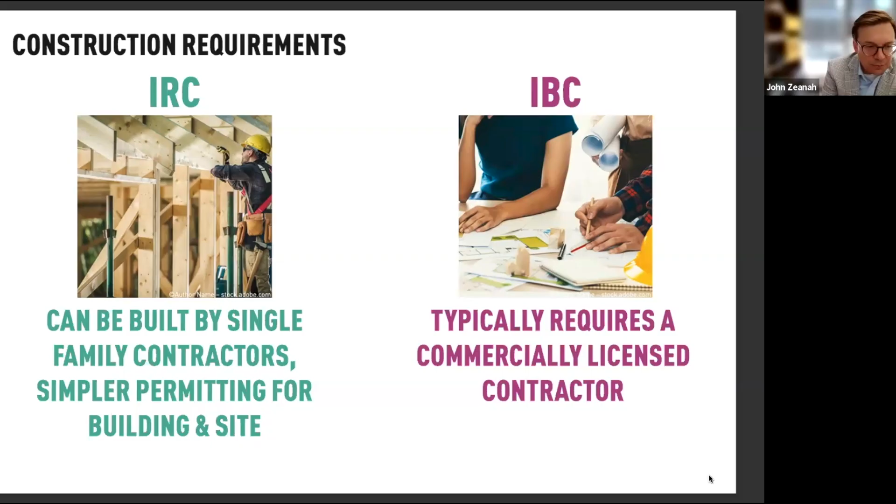The residential code includes a lot of prescriptive structural tables. In other words, a lot of the engineering for residential code projects has been done for the code, and so the builder simply just has to follow a lot of prescriptive standards that are in the code. Builder prepared plans are often sufficient - there's not a detailed plan set that includes things like mechanical, electrical, plumbing, the types of things required in the building code. So designs that go through the building code typically require a professional stamp from an architect or an engineer, not just for mechanical, electrical, plumbing, but for structural and for things like sprinkler engineering.

In most jurisdictions, residential permitting is much simpler, but commercial permitting is much more difficult. A lot of communities have different pathways for getting through the building code review process for a residential permit versus a commercial permit. The IBC covers everything from the small multifamily - 3-unit, 4-unit, 6-unit, et cetera - all the way up to industrial warehouses, airports, sports facilities. So it's natural that there's going to be a higher level of scrutiny for larger commercial projects. The issue is our smaller multifamily projects are getting lumped in with those.

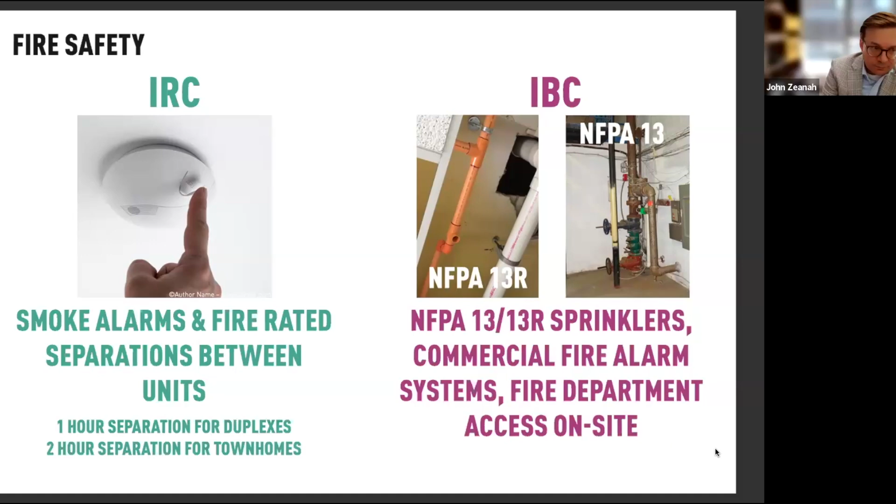There is also the NFPA 13D system. As I mentioned, 48 out of the 50 states in the U.S. do exempt buildings in the residential code from sprinkler standards. The NFPA 13D standard is designed for buildings in the residential code, so we don't see it as often, but it is a lower cost standard than the NFPA 13R, and is a standard that some states and cities are experimenting with using on structures that have more than two units, particularly for small multifamily.

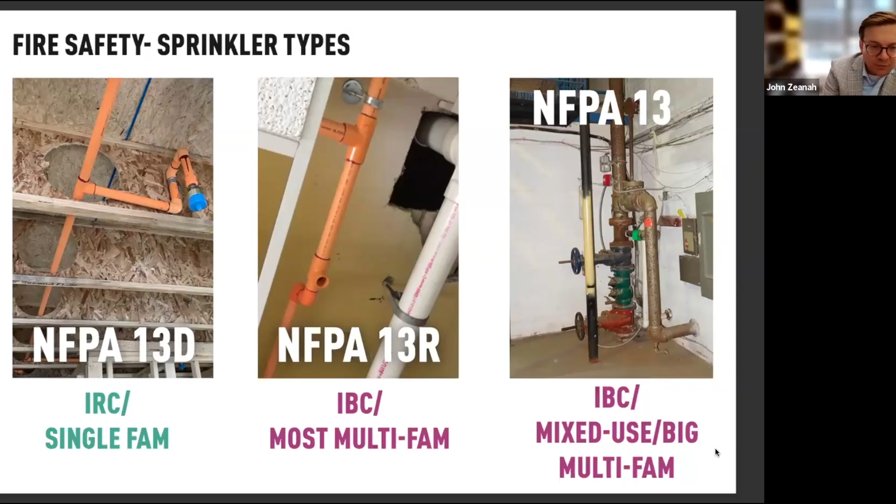There are other local code hurdles as well. As I mentioned, that gap between 2 units and 3 units that's in the building code often gets transferred over to other code requirements in local jurisdictions, just to create a dividing line between residential and multifamily, residential and commercial, residential and non-residential, however it might be divided in your jurisdiction - everything from trash requirements, tax requirements, parking requirements. There's a lot of differences that get placed in that gap between 2 units and 3 units.

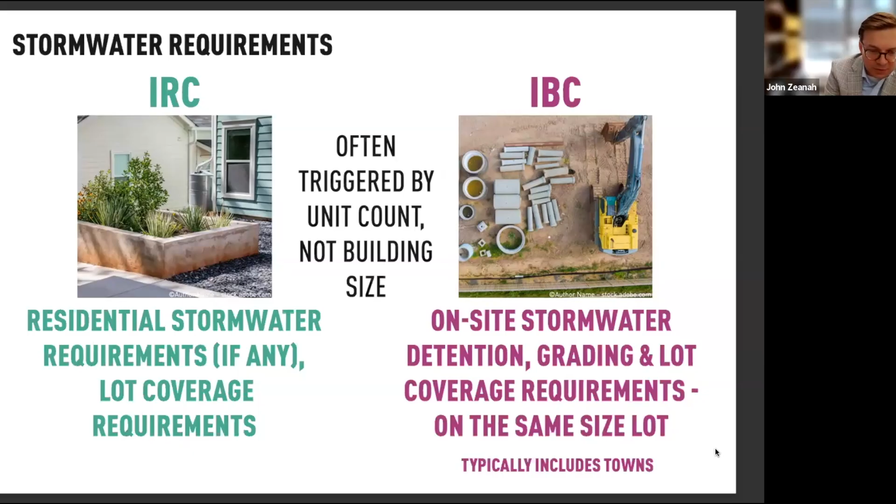Some common requirements are in stormwater, which are often triggered by unit count, not necessarily building size. But the issue with stormwater is really about the area of impervious surface, which doesn't have much bearing on unit counts as much as building footprint. So a single family house with the same building footprint as a quadplex may have much lower requirements in terms of meeting stormwater compliance in one jurisdiction or another.

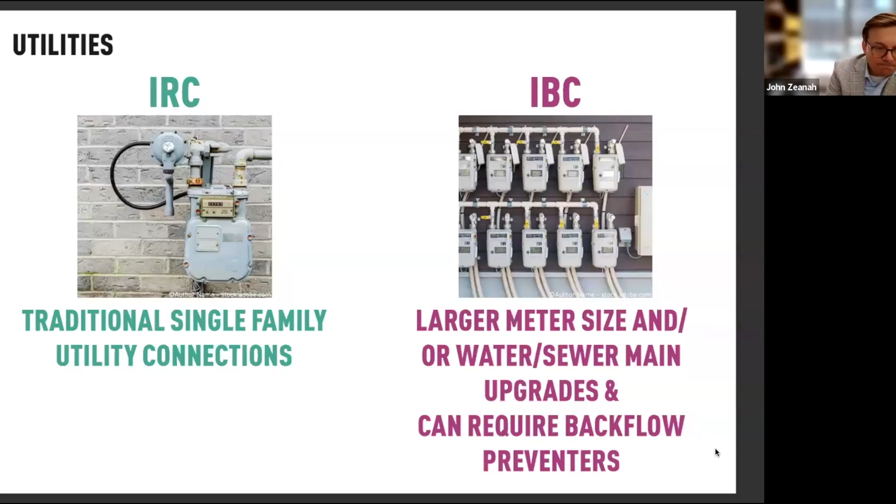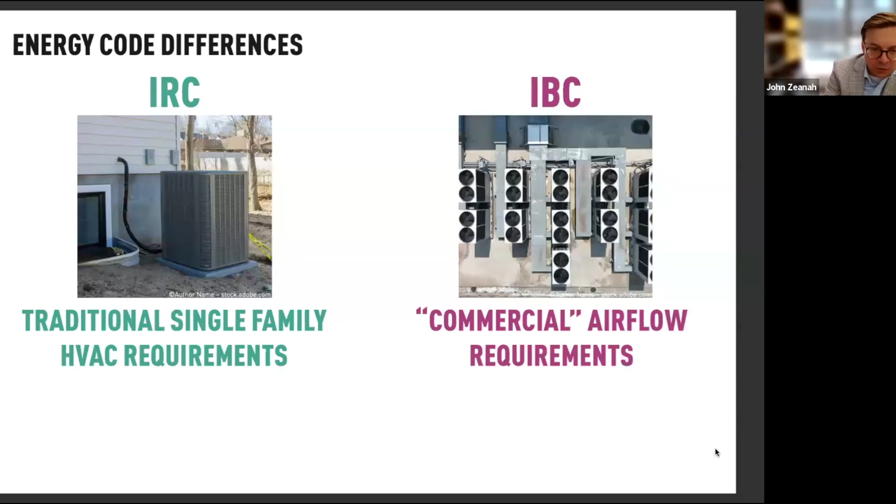Energy code differences are found between the residential code and the building code. Certainly energy code requirements help ensure that as new buildings come online, they're more sustainable and more resilient. But again, they're written with a divide between 2 units and 3 units, so the higher requirements typically attach to small multifamily once you get to 3 units.

Accessibility requirements attach once you get to 4 units.

Elevator requirements typically attach once you go beyond 3 stories.

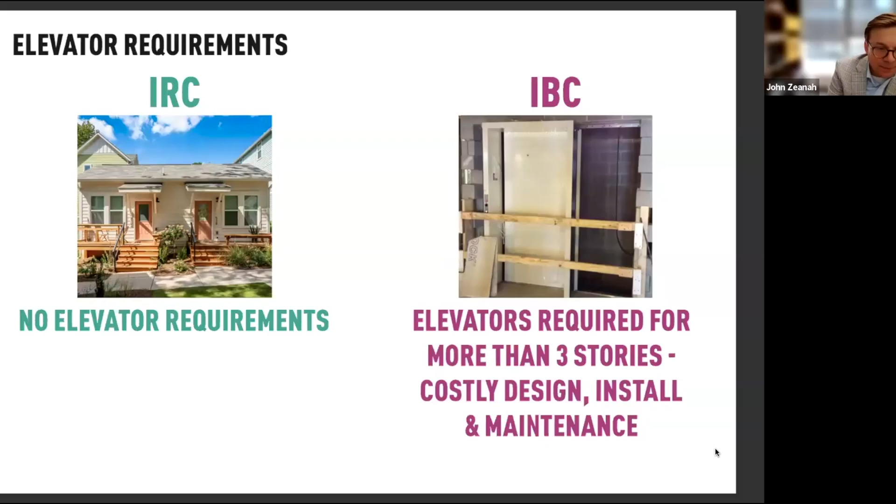Stair requirements also get added on once you get beyond 3 stories.

And then, of course, if you're trying to do renovation of existing buildings—maybe your town has a lot of older single-family buildings that are sized in such a way that they could be converted into a quadplex, for example—those codes, that change of occupancy, triggers a lot of these additional requirements. So if your community is looking at changing building codes, don't forget about existing buildings and what needs to be adjusted to make sure conversions are treated the same as new construction in your community.

Last couple of things: mixed use is another example of code burden to think about. For a lot of communities that want to see small mixed use, the ideal is to have ground floor commercial with residential above. But a lot of times those projects get kicked up into a much more stringent level of requirements. On the earlier slide, when I showed the difference between the 13R and the 13 sprinkler system, you could visually see the physical differences between those two systems and what all is required. A lot of vertical mixed use is going to kick into those commercial sprinklers, even if the ground floor commercial is not something that would require, say, a vent hood or have combustible materials, that sort of thing.

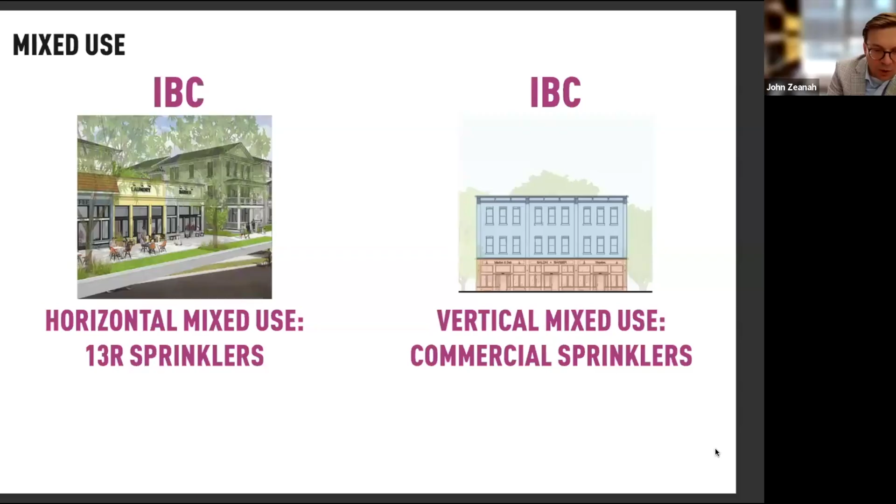The bottom line here is that through so many of these regulations, what we're doing is streamlining multifamily permitting and construction while extracting the most concessions out of our commercial development. What it often does in many jurisdictions is this: communities try to make middle scale housing legal by changing zoning, but then there are all these other regulations where we're extracting maximum concessions from IBC development that make missing middle infeasible to build. So really, the main point of the report that was written is that for communities wanting to see more middle scale housing built, you've got to go beyond zoning. Zoning is certainly a critical first step, but there are so many other steps that communities need to look at in their regulatory environment.

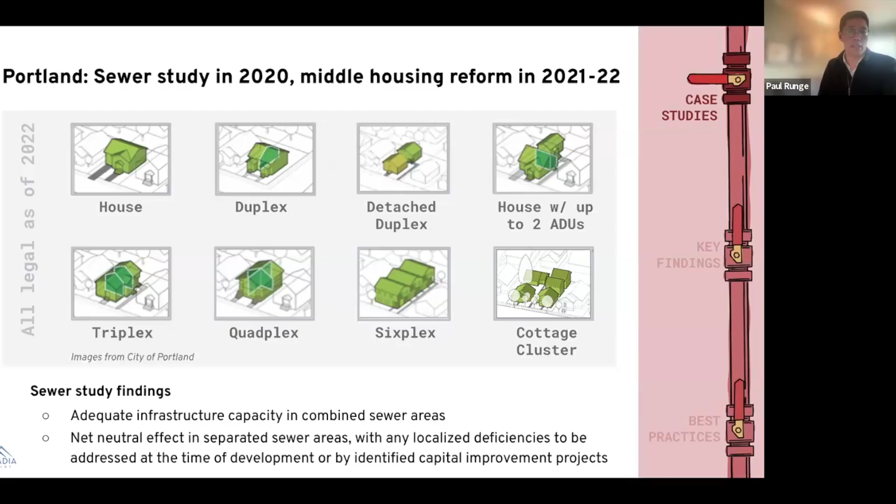The issues were also alleviated by requiring developers to extend or upsize infrastructure if they wanted to develop parcels considered inadequately served. So Portland's study ultimately concluded that middle housing would have a net neutral effect on the separated sewer system because of all of those interventions. The study gave middle housing the green light to move forward. So as a high level takeaway, the city started from a place of 'yes, this can work,' then sought reassurance in detail through a study, and then put in place policy solutions to ensure that the change went smoothly.

Since middle housing was re-legalized, Portland has permitted over 1,400 new infill and middle housing units, including infill middle housing and accessory dwelling units. And as expected by the study, the city has not experienced any localized overflows and backups.

So, a success. Developers do have to manage stormwater on site as much as feasible. They have to upgrade deficient infrastructure that may be around or serving the site. But what that generally means is that developers seek sites that can percolate stormwater and that are in areas well served by infrastructure. In other words, developers try to avoid costly problem areas.

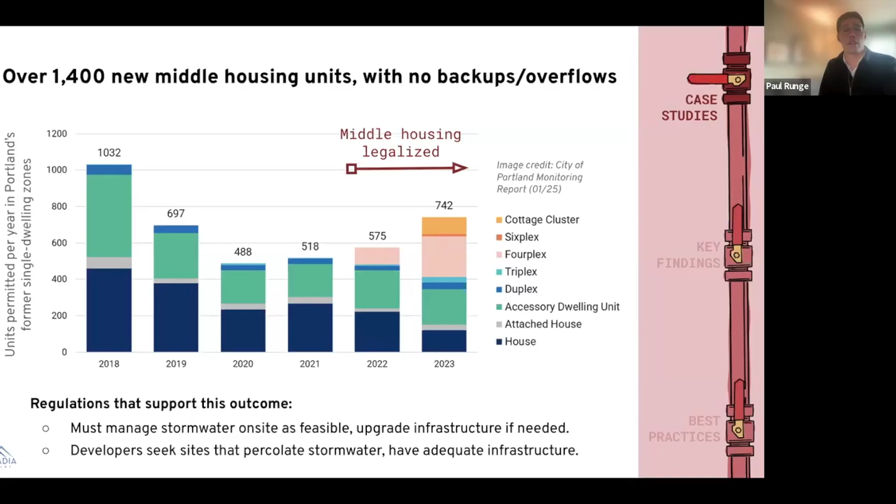The city is now considering allowing mid-rise apartments in a large part of Portland's inner east side, following a similar path as they did for middle housing, starting with a study. The city's Bureau of Planning and Sustainability has completed a study of infrastructure capacity in 2025, and the City Council's Land Use Committee recently unanimously approved a resolution to consider zoning changes by mid-2027.

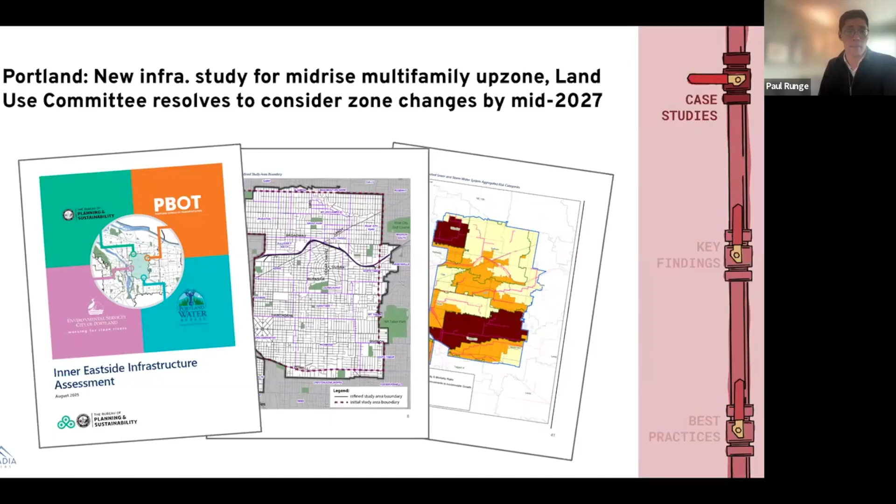So we think this is an illustrative case of how all this can work, and of our broader point that cities don't need to blindly block middle housing over sewer concerns. You just need a game plan. Existing infrastructure can often handle the job and gives you a place to start. We encourage folks to start from a default position of, yes, this can work. Let's figure out exactly how.

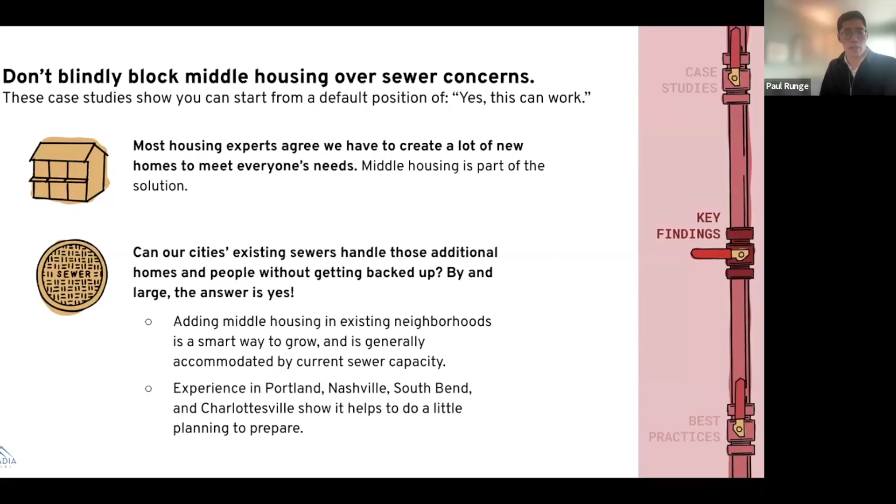And to John's point, it's very smart to identify what the most cost-efficient solutions out there are, so that you're not overburdening development with requirements that aren't necessary. Okay, that's it for me. I'm going to pass it to my colleague Tara to finish this up and take us through our high-level takeaways, starting with the next slide.

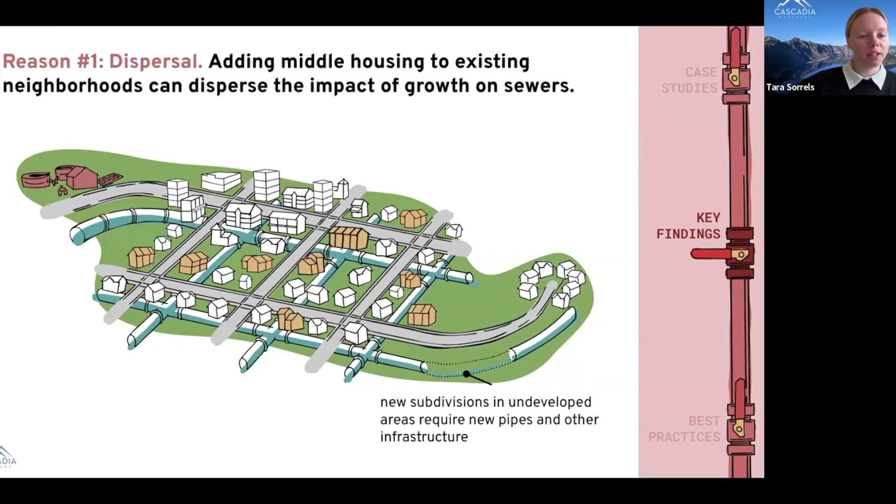Thanks, Paul. So if our case studies show us that a breakdown in sewer infrastructure isn't happening, which they did, then we have to ask why. I'm going to share some of our answers to the why.

The first reason is dispersal. When we build a large new subdivision on the edge of town, we have to lay miles of new pipe, and the downstream trunk lines may or may not handle that concentrated increase in flow. Middle housing is different, right? It's a distributive growth model. It adds units into the existing fabric across the city so that the impact is spread across the whole network rather than hitting one single pipe all at once.

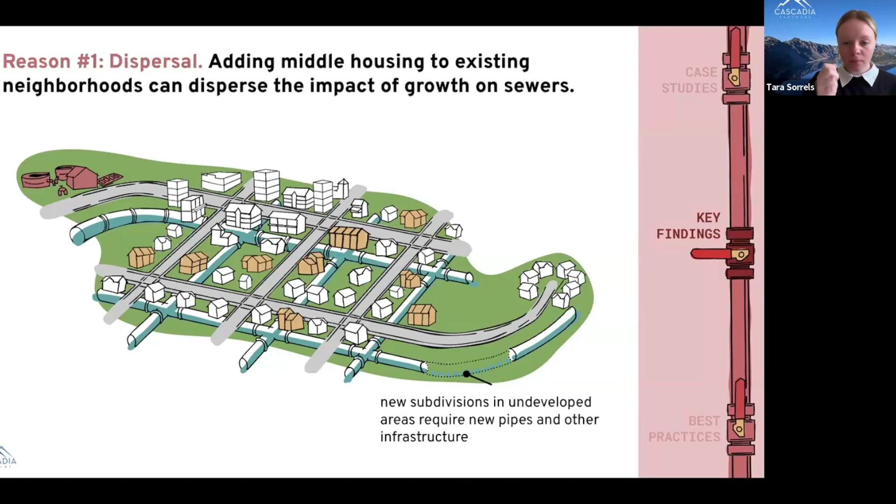The second reason is timing. Middle housing is incremental. It doesn't happen overnight. If we have a built-out neighborhood city block that is rezoned for fourplexes, we're not going to see 10 fourplexes pop up the next morning. You may see one this year, another in 3 years, two more in a decade. And so this gives the city's public works department time to monitor flows and time to align utility and maintenance cycles with the actual rate of growth and where that growth is going.

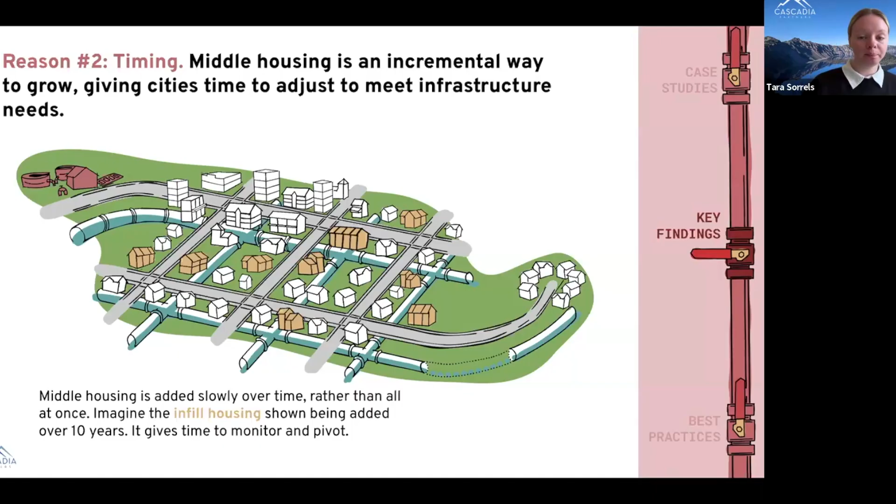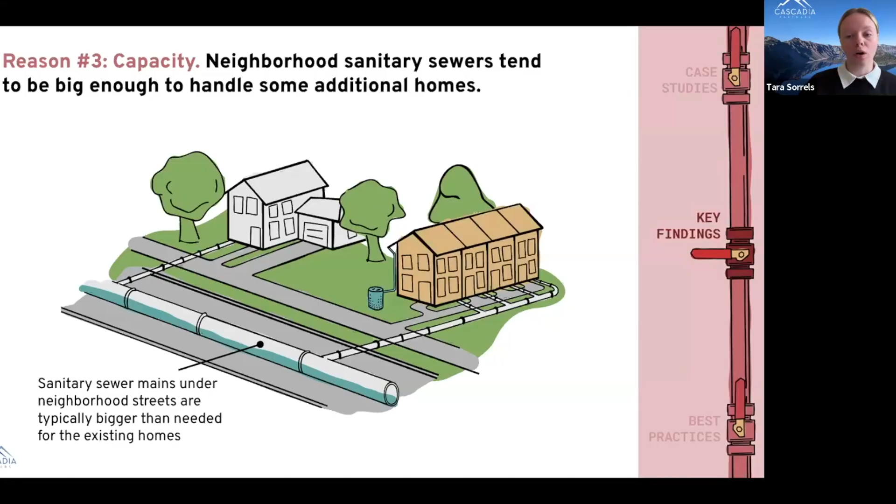Reason number 3 is a technical one, just basic pipe capacity. Neighborhood sanitary sewer mains are typically sized with extra room, as Paul was stating, to avoid regular backups. In our case studies, the engineers we interviewed also felt confident that the existing mains under residential streets would typically have enough room to accommodate the additional flow of a few ADUs or extra cottage clusters without any additional issues.

Fourth, we have policy solutions. We don't just have to hope that pipes work. We can use policy to make them work. As Paul mentioned, stormwater is often the bigger hurdle, but cities can enact rules to manage that.

We can limit new flows by regulating lot coverage and not requiring off-street parking. We can also reduce the burden on the public system by installing green infrastructure within the right-of-way and fixing old pipes to prevent inflow and infiltration of groundwater into that system. And then we can also require developers to manage some or all new stormwater on site using strategies like rain gardens, permeable pavers, or dry wells. In this way, we can grow our housing stock while simultaneously modernizing our drainage strategy.

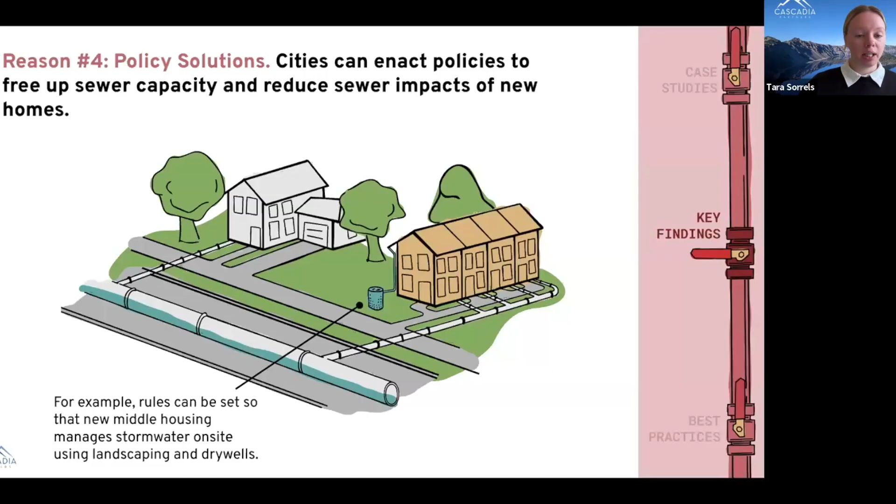Every city is going to have its own specific needs and context, but there are many tools available to choose from to meet those specific localized needs while also still encouraging that development to happen.

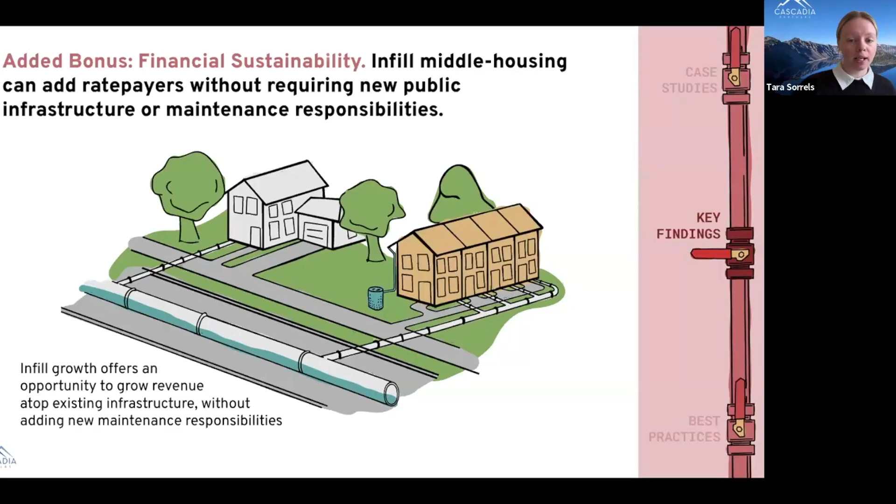So now there's an added bonus, the financial sustainability of infill. Infill middle housing adds new ratepayers and new revenue, often without adding a single new foot of public pipe that the city would eventually have to pay to repair or replace. And so infill housing is a way to maximize the return on investment of the infrastructure that we've already paid for.

Next slide, please. So how do we implement this? I think John hit on this as well. It starts with collaboration. We need to break down the silos between the housing planners and the sewer engineers. We should bring engineers into the room early. They can help identify where the system is strongest and help draft codes that make it easy for small-scale developers to connect to the system without adding unnecessary red tape or expense.

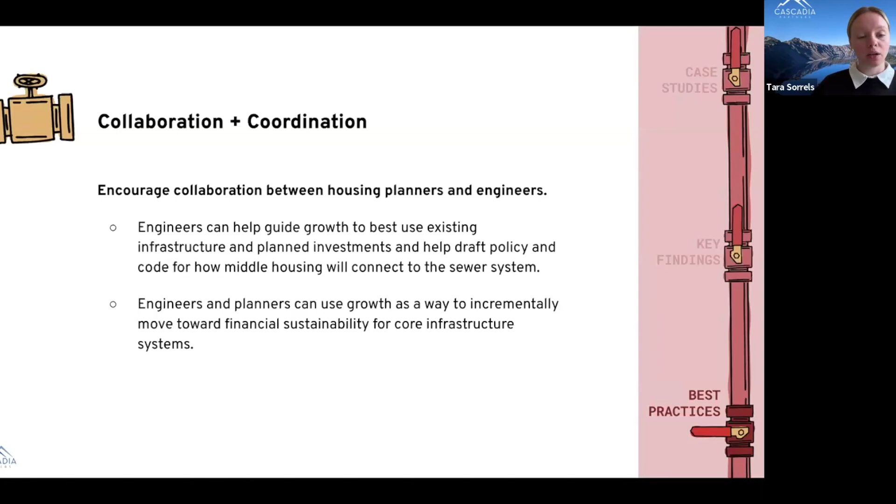And then on the planner side, planners need to make a strong case to engineers for why middle housing is a necessary solution, and be sure to consider the impacts of various development standards on sewer flows specifically.

We also need holistic planning. Cities should be transparent about their bottlenecks. If there is a specific neighborhood in the jurisdiction where the pipes truly are at their limit, show that on a map. We don't want to block middle housing everywhere because of a problem in one spot, and we certainly don't want to surprise builders of middle housing with a bottleneck that they couldn't have known about.

We also recommend providing pre-approved building plans. We saw this in South Bend. These don't just save developers money, but they can allow the city to pre-vet design and massing choices that can also minimize sewer impact from the start.

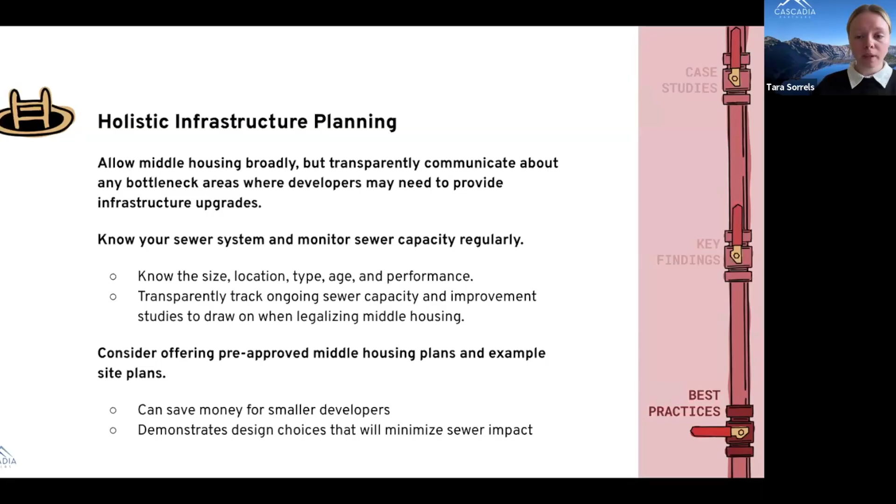Finally, we need to modernize our technical solutions, or our technical standards specifically. One of our findings was that simple tweaks can save projects. This gets at what John spoke about regarding local code hurdles and utility connections. For example, allowing multiple middle housing units to share a single 6-inch lateral pipe rather than requiring a brand new cut in the street pipe for every front door of the same development. That can be the difference between a project being feasible and a project failing.

Testing our requirements for financial and physical feasibility helps to ensure that developers are actually incentivized to start building the housing that our communities need. At the end of the day, we want middle housing to be built. Our report shows that incremental growth can typically work within existing infrastructure, and there are policy tools available to adapt to any local conditions that make that more challenging. But fear about the sewer system just is not a necessary ingredient.

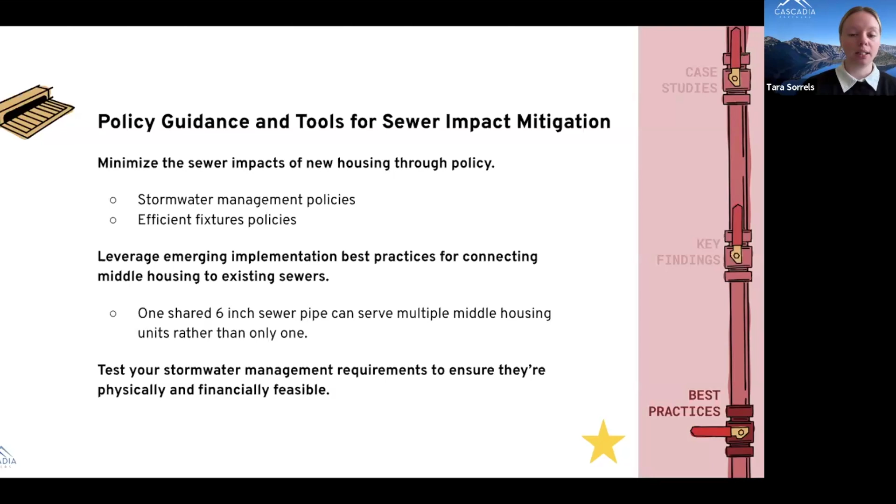With that, I'll pass it back to Adriana, our moderator, for Q&A.